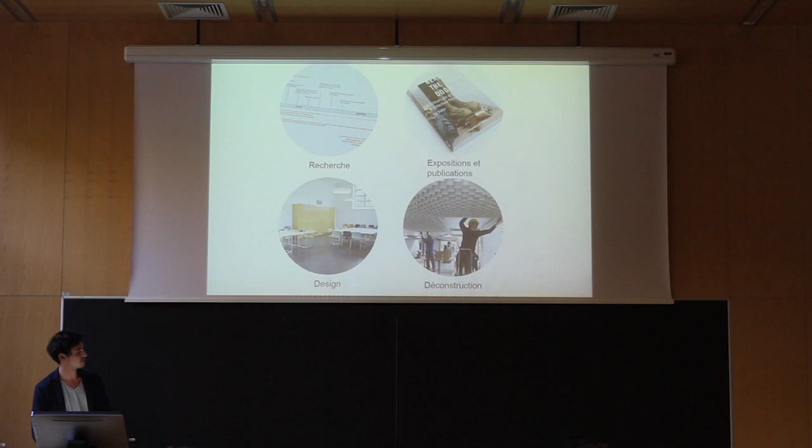And the focus is to professionalize the practice of reuse in construction. So we are doing research, and we have a research team. We're doing exhibitions and publications to talk about this topic with the public. We have a design team, to understand well and better the issues of reuse for designers. And we have also, in 2016, a spin-off of Rotor, which is Rotor Deconstruction. It's a company specialized in the extraction and dismantling of elements of architecture. So, as you can see, we need to work on these levels to make reuse work as a professional level.

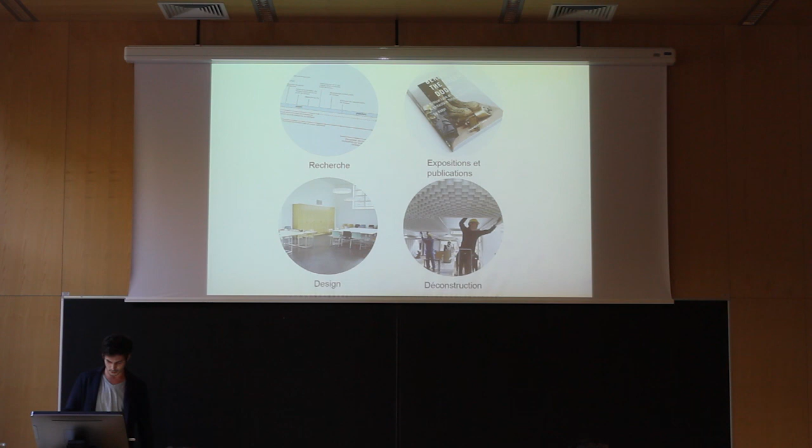But before talking about our projects, I just wanted to talk to you about why we don't reuse material in construction nowadays, and what happened. Because reusing materials in the history of architecture has always happened, and it's only in the last few decades that it disappeared, for many reasons. Now we are discovering again this practice of reusing.

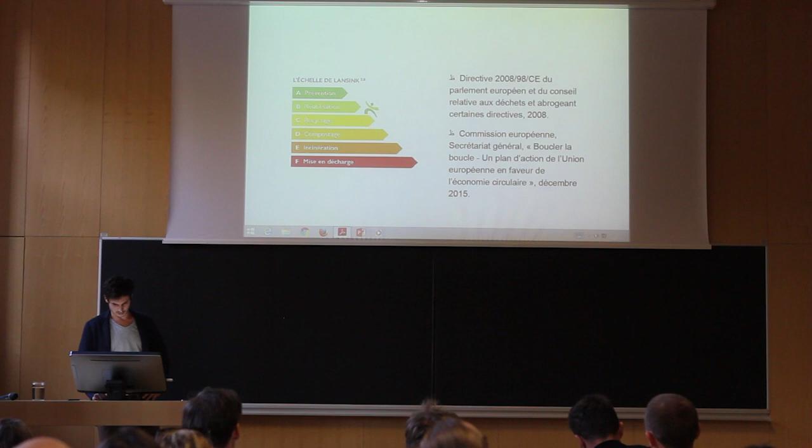And where are we nowadays? This isn't really a fun page, but it's the regulation in Europe about waste management and reuse. It's at the top level of the strategy for managing waste, above recycling.

If we compare to recycling, in 1980 it was really hard to do recycling on the building site. We needed 30 years of prior action with institutions and associations for example, to arrive at where nowadays we separate the materials on the building site, putting structural work in one container and finishing materials in another. So we needed 30 years to develop this recycling industry.

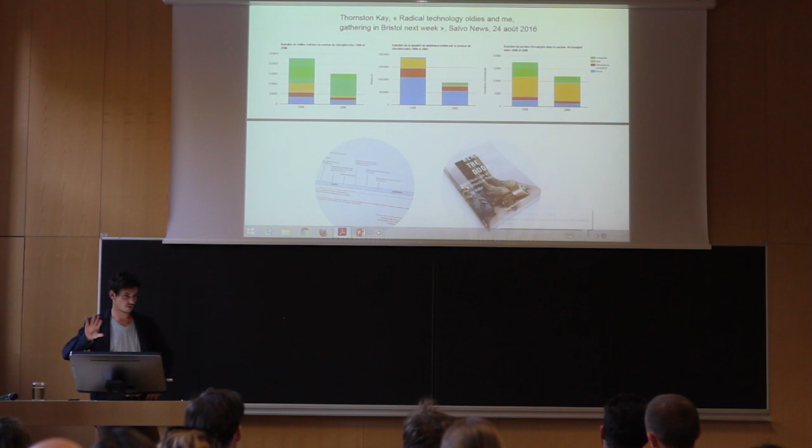So that was just a small part, but I wanted to tell you this story because it's where we start with the work of Rotor. I'm sorry if my English is a bit bad because it's the first time I did it in English, but I'm sure you're going to understand the point I want to tell.

As I told you, we have four sides: research, exhibition, design, and deconstruction. I'm going to show you some small stories in each of these areas, and you're going to understand what we are doing.

So, exhibition - here we are in Venezia, and we were curators for the Belgian pavilion in 2010. In the Biennale of Venice, you're more used to seeing this kind of model, white model with not a lot of texture, and we decided for our pavilion to show the reality of building.

When you are an architect and you design a building, you look at the materials in the catalog, and you look at the material as new, at their first time of life. But finally, at the first week, there's going to be the first scratch and first mark. And 99% of the life of the material is with this kind of mark.

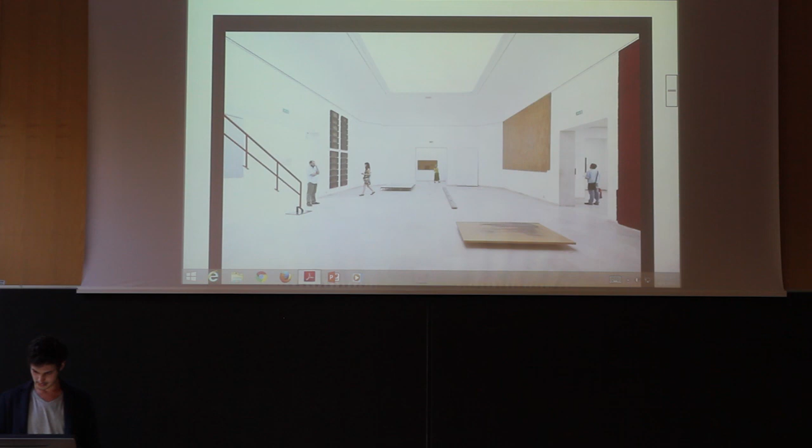This is a stair, and we make a display to show these elements of architecture and their marks in the best way we can do it. So here are the stairs and other elements. Here it's the carpet of an apartment, so there is the mark of the chimney and also the path.

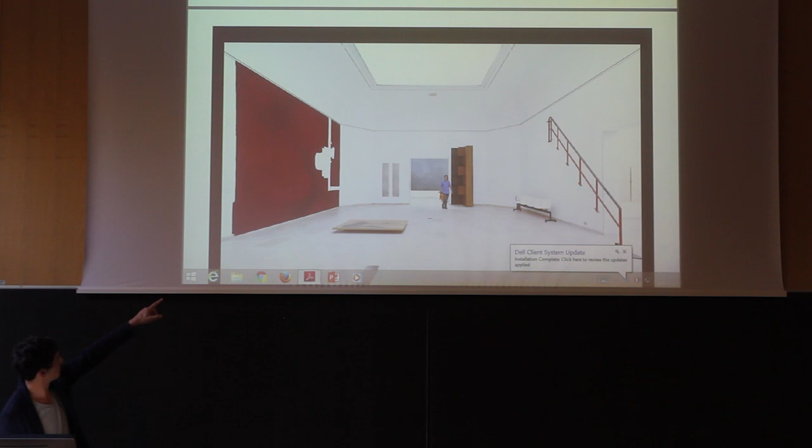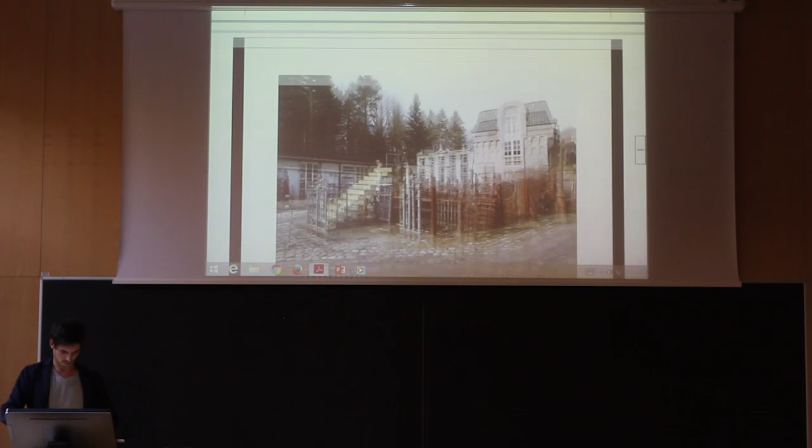Deconstruction. So after this works, we realized that all these companies were active in the reuse of material, but it's a lot of old elements like stones, wood, and doors. But we were asking, what happened for this kind of buildings? And we talked together and said, maybe we should be part of the sector of deconstruction and find a solution for these buildings. Because when you look at the book of demolition offers every month, you see a lot of this kind of building, and few buildings with traditional materials.

So we made an analysis on the duration of rent in Brussels for office buildings, and when the landlord gives a floor to someone, he cleans all the floor and puts everything in the trash for the new one. And sometimes the duration of the rent is less than 3 years, like for 23%. So it was the first opportunity to do something, because it's quite new materials, like interior buildings, that you can deconstruct, and they have less than 3 years of use.

So this is the kind of interior we can see in the common office building. There are ceilings, doors, partition walls, floors.

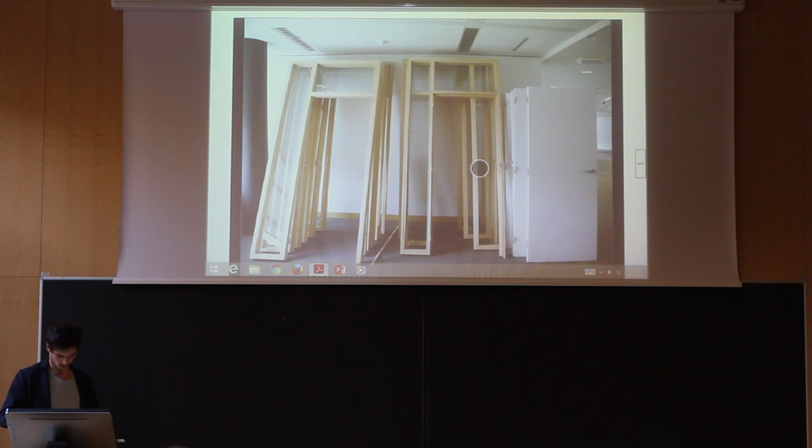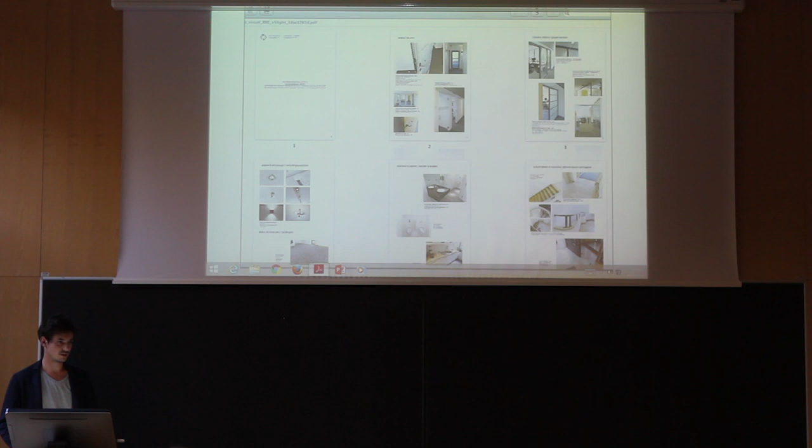So that was the first building we demounted. It was the headquarters of Levis in Brussels. We did an intervention and saved some partition walls, ceilings, doors, and other furniture. We collected them, made an inventory of all the materials, and diffused it to the whole network of resellers. At the end of the building site, almost all the materials went to other resellers. And for the ones who didn't find a reseller, we stocked them at a warehouse to sell later.

At the end of this operation, we calculated the amount of material we saved in one operation. On the left is all the material we saved during the activity of Rotor before this action, so 22 tons of material. In one week, we saved 30 tons of materials. So for us, it was really a success for reusing material.

Of course, it's a prototype—Rotor Deconstruction still has to evolve. Now I'm going to show you some examples of design we're doing, but we can do design before completing all these steps, like finding resellers, understanding how you can demount materials, knowing the regulation, and making new papers to extract these materials.

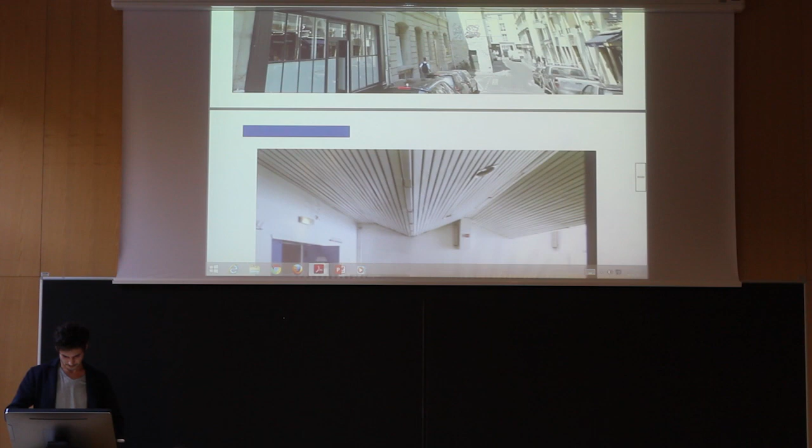So instead of doing this small scenography and intervention, we proposed to make a small renovation—an interior renovation of the building—so they could open it all year, for artists and also as a ressourcerie to stock materials. So it was this kind of interior, with just a small sketch like this. We are architects, but when we are doing design, it's like that—we just come to the place, make a small sketch and a small drawing, and then propose it to the client.

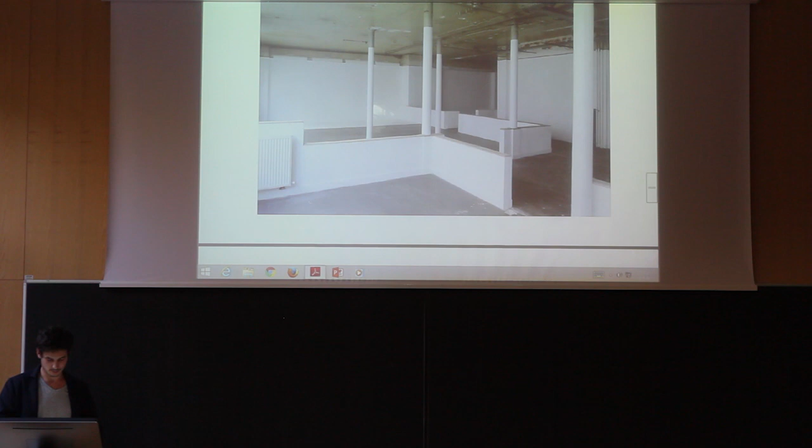And here in this picture, we see that the windows were going up to the ceiling. So we decided to just move the ceiling a bit, and then the room was totally new and clean, just enough to make a new space for exhibition and art. Here it's the old class, and we made a small intervention, cut the wall, but just kept this part to make a seat for meetings—just trying to clean the space with a small act.

So then their meeting can happen. At the top level there was a former fashion design office, and we needed a huge table for this building. So we looked at the ceiling, and finally found a good one with this beam, and decided to flip it over. Then we had a huge table, and it's really rare in Paris to have a place where you can have dinner for 40 people.

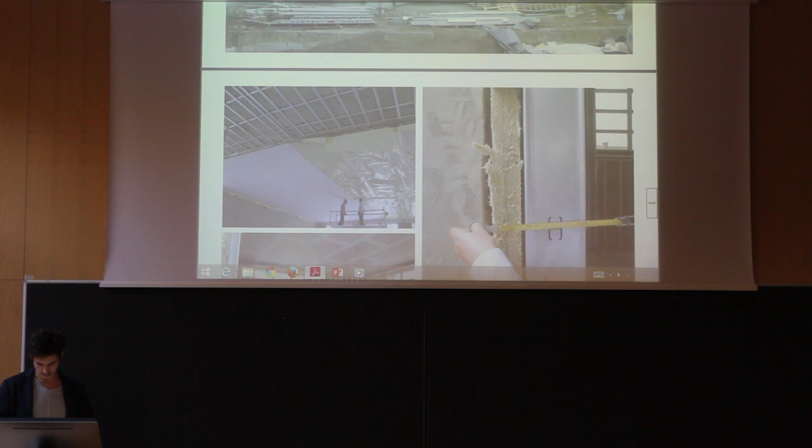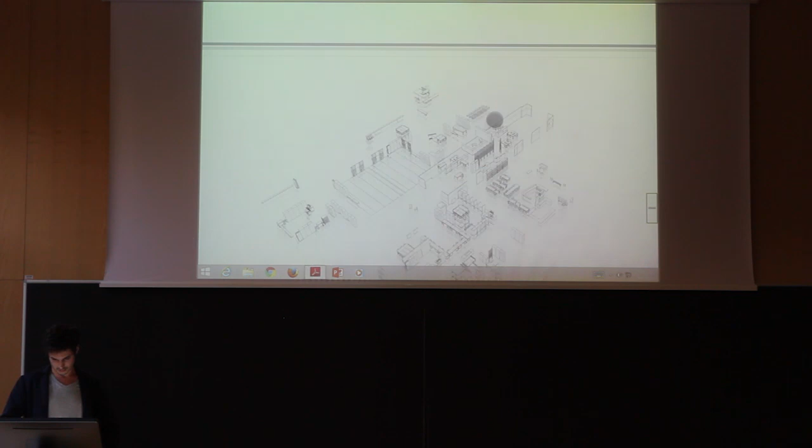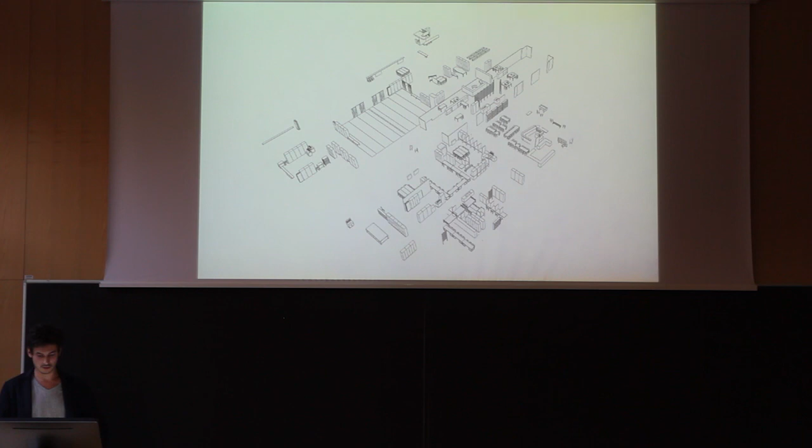And then we applied for this market, and because of the separation of these two markets, we were free to do what we wanted inside with the materials. So the thing we proposed to the client was: okay, we need some furniture for inside, but we don't know which yet. We're not going to buy from a catalog, but find it in second-hand shops and stuff.

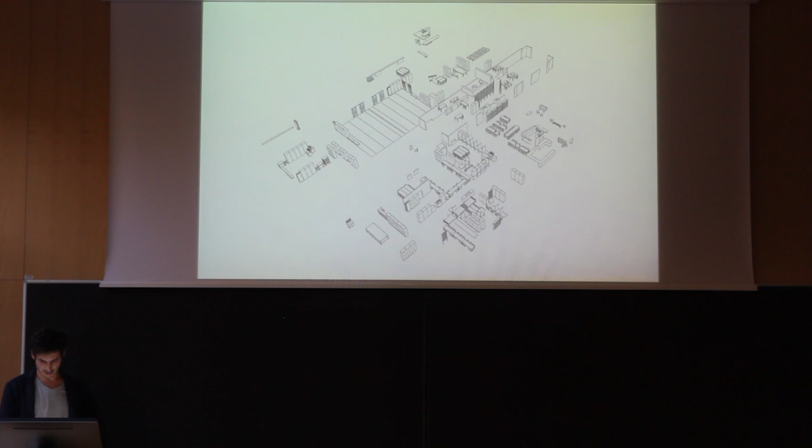So we decided to make this project plan but without texture, and just say okay, we need 10 chairs, 12 tables, a shelf and stuff, and give them some small ambience, but with a bit of color.

At the same time, we had this deconstruction building site in Brussels. It's the former headquarters of the BNP Paribas bank, and there was this restaurant area which was 70s style and a bit old. We proposed to them just to dismantle these materials and install them in the new project of Bonnel.

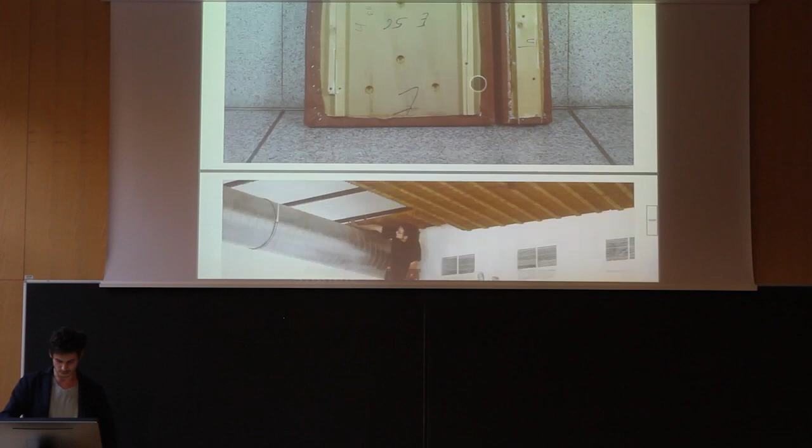So we analyzed the materials, the furniture, and found the best place to install them. Here is the ceiling. We made some prototypes for the chairs, a new counter for here - this is for the plates - and we made a table with this other bar counter.

So then the elements inside the project were kind of reinterpreted, and it became something new. You wouldn't see that it was a 70s interior design, and with this small shift from one building to another, just a small intervention, we created this kind of interior.

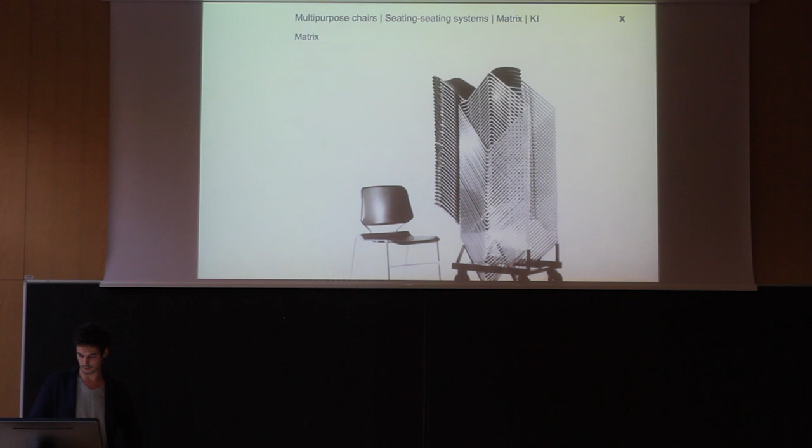So sometimes there were six chairs for 30 euros, sometimes it was 2 chairs for 69. But at the end, we had enough chairs at the lowest price to furnish an audience room, with the best chair you can find in design history.

This is another project, maybe the last one I'm going to talk about - a library in Brussels. The clients wanted interiors and furniture to be second-hand. It was this kind of project that's really easy to do nowadays with the elements we have in stock or know are on the market. So the furniture goes into the project,

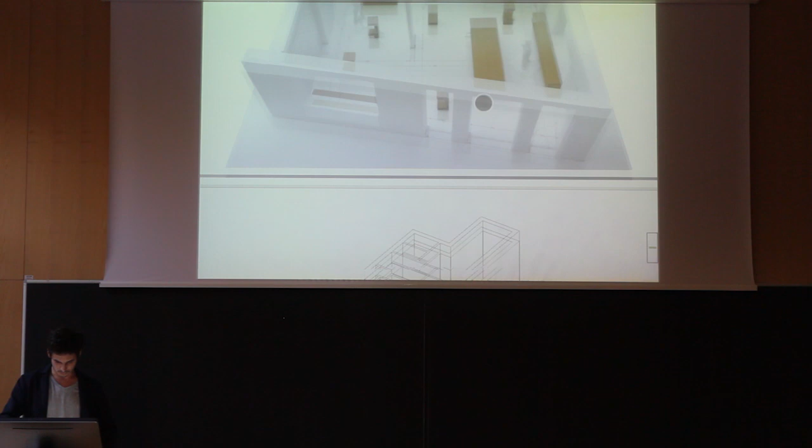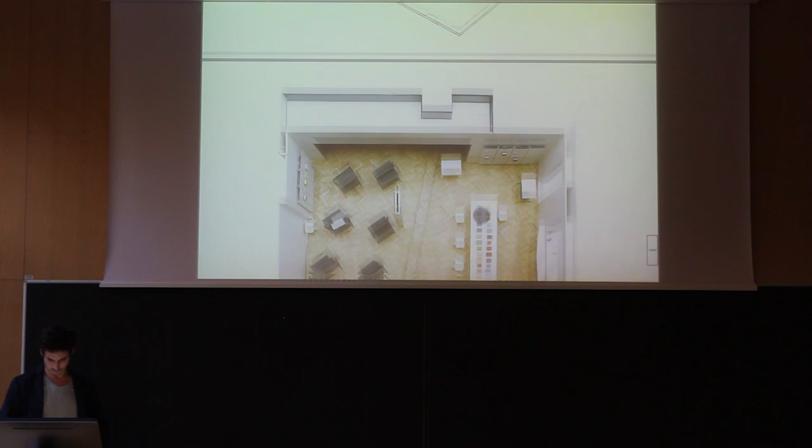with other elements from the headquarters of the bank, and others from other buildings and an old school. So it was kind of an easy project, and we decided to make just a small spatial intervention at this part - a small architectural act - to create this background for the library.

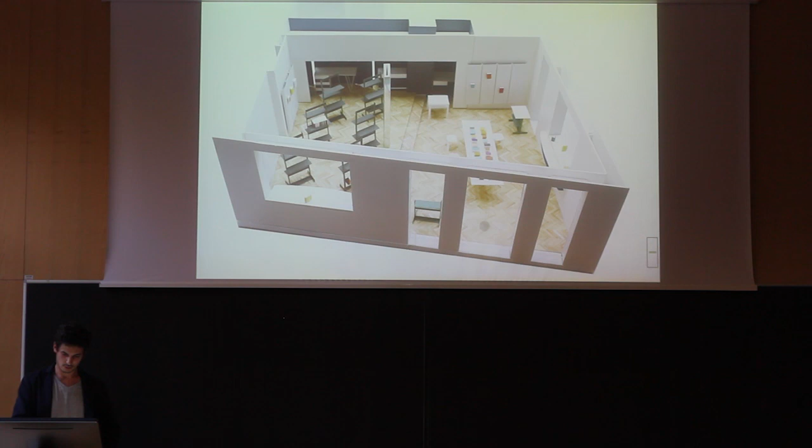So okay, all the setup - for the background of the library, we needed to find a wallpaper, and we didn't have a reused wallpaper, so we looked at colors and said okay, let's find this blue in catalogs. The client was okay with it, but it was still missing something.

And the last day before ordering it, people from Rotor - one of them was working with the opera house of La Monnaie in Brussels - visited the stock because they'd asked us to find a solution to manage their stock of scenography and display elements. We found this painting from a play I don't remember the name of, and he said okay, it's a win. We asked the team of the opera house to help us install it.

And instead of this blue textile, we installed this display from the old opera house.

And then the project have something.

But I wanted to finish with these pictures because, as you can see, in the design we can find some fancy stuff and good solutions because we have good guys. We can observe the materials and do the good shift. But the most important message I want to tell you is that the success for reused materials is if we can apply reused materials in all houses, this kind of interior where there is no design—it will be a success much more than the design we're doing, because in Brussels all the houses have this kind of floors, and if we count all the number of houses, you can let you imagine.